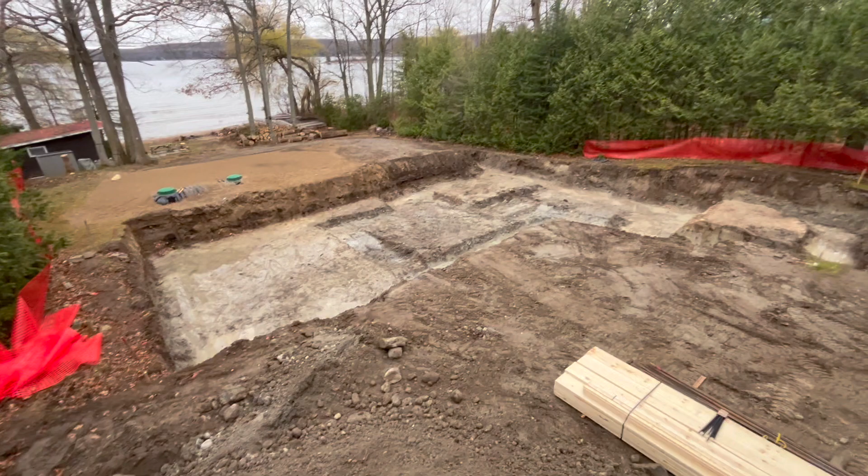I'm gonna put a laser in that back corner. The highest spot is right here. It's set to the concrete.

Good morning. Today we're working on the forms and we just got the lumber and rebar delivery coming in. So I haven't updated you guys in a while, but this is all the excavations. We ended up having to go down a lot deeper, like I said earlier, because of the old house. And I guess you can kind of see where the foundation of the old house used to be.

Our footings are gonna come across, step up, step down, and we have one step right there. My game plan is I'm gonna put a laser probably in that back corner and then walk around the edge, find the highest spot and the lowest spot, and then figure out where I want to put my level of forms down. You'll see. Okay, let's get started.

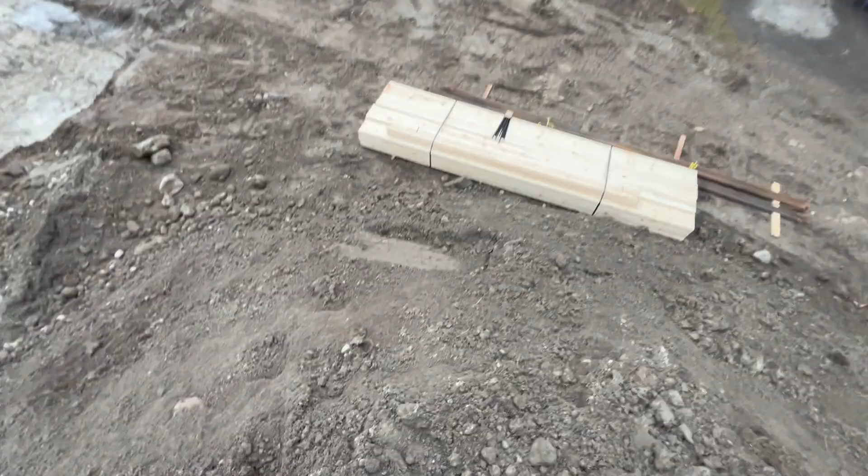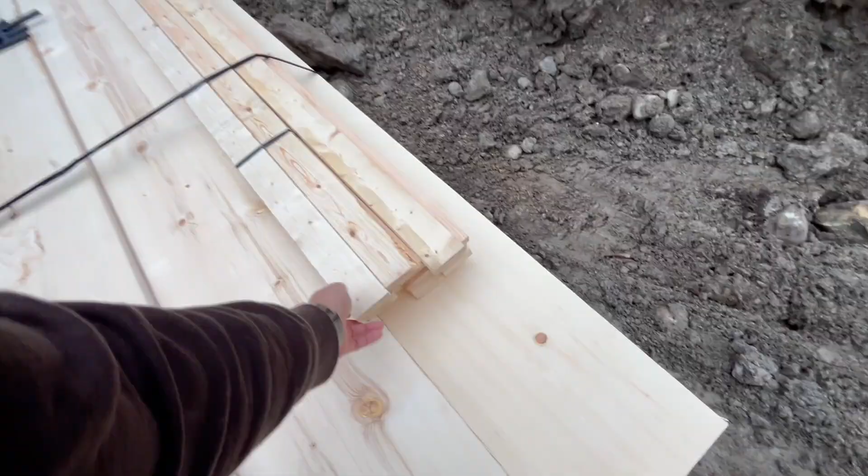This is all the lumber and rebar that they gave us. So we were forming up with 2x12s. We're gonna have some 1x3 cross pieces on top to hold them in place. Here's my 15M and 10M. So these ones will be my dowels, connecting the footing to the frost wall, and then 15 running along the base.

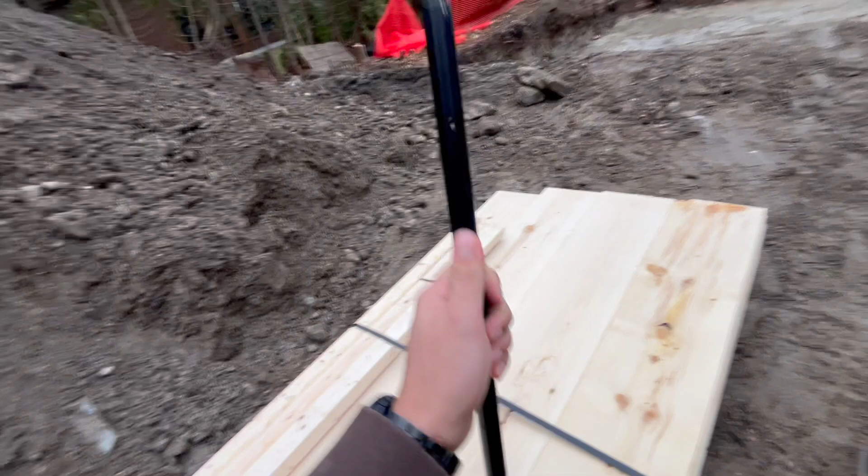And then I got a bunch of stakes. We'll use 10M and we'll use these, but we'll screw footings down like that. And then we got some safety pins over here. So if anyone falls into the trench, they don't get penetrated by the rebar. So this will just hit their chest and then they'll be stopped. Okay, I'll set the laser up and then you'll see my plan.

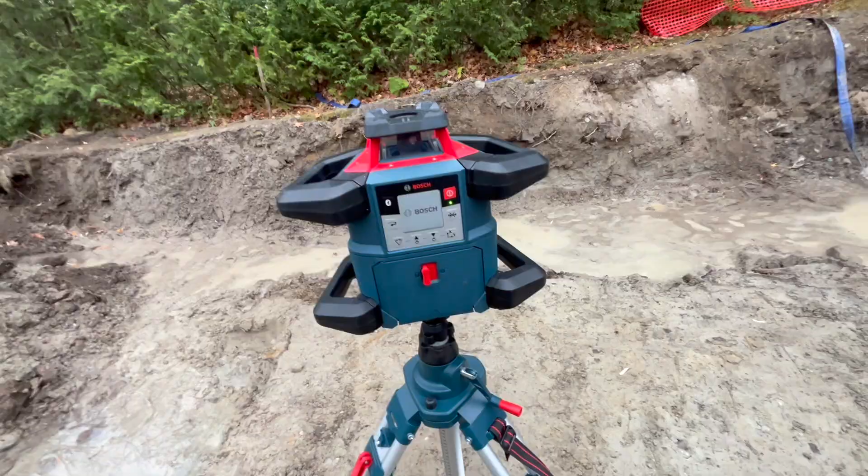Okay, so now I got my laser set up in this corner. The reason I put it there is because if I put it over there, then you wouldn't be able to see these corners here. So that's why I put it here. Now I'm gonna go take the receiver, walk around, and then find the best heights to use.

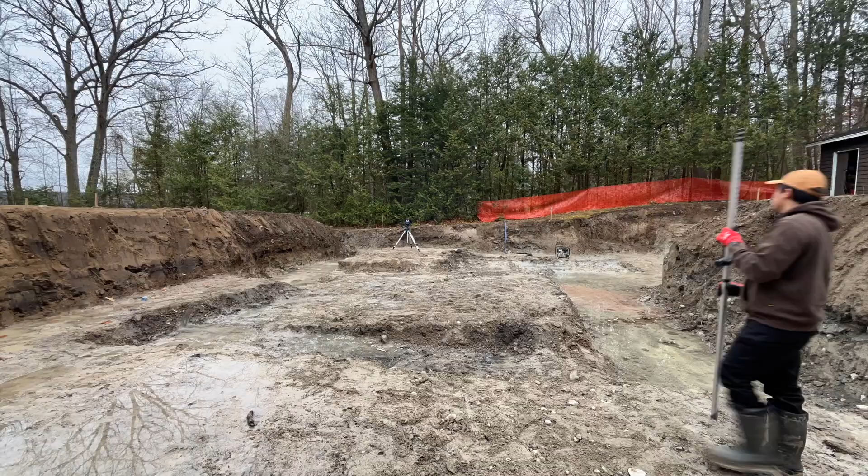What I did right there is I went along this top step and I found the highest spot. So I set my grade stick, and then if it needed to go up, I just put it up a little bit till I found the highest spot. The highest spot is right around this area right here. So that will be the bottom of my form, and then the rest of the form I'll just elevate it up a little bit.

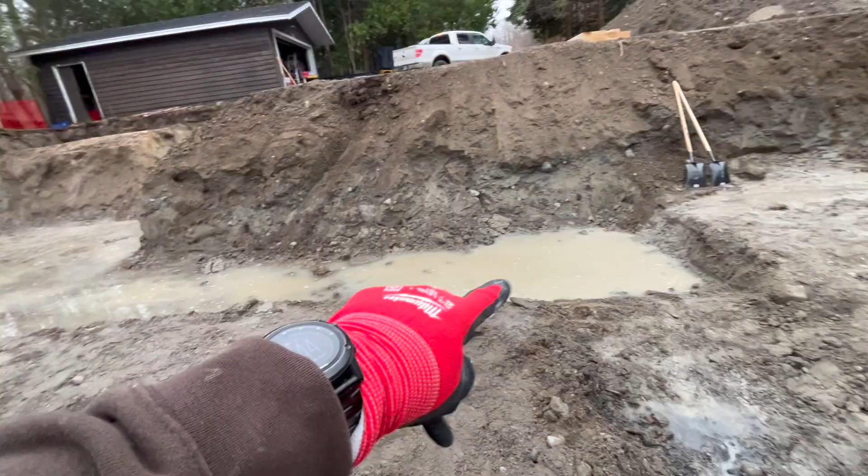So now I'm gonna do the same for this level going across all the way to there. This bottom elevation right here, coming from there, wrapping all the way around, the highest spot is around over there. And on this step, highest spot's right around here. Now what I'm gonna do is take my laser up top and pull maybe this line, and then I'll bring my footings, I'll set it to this height.

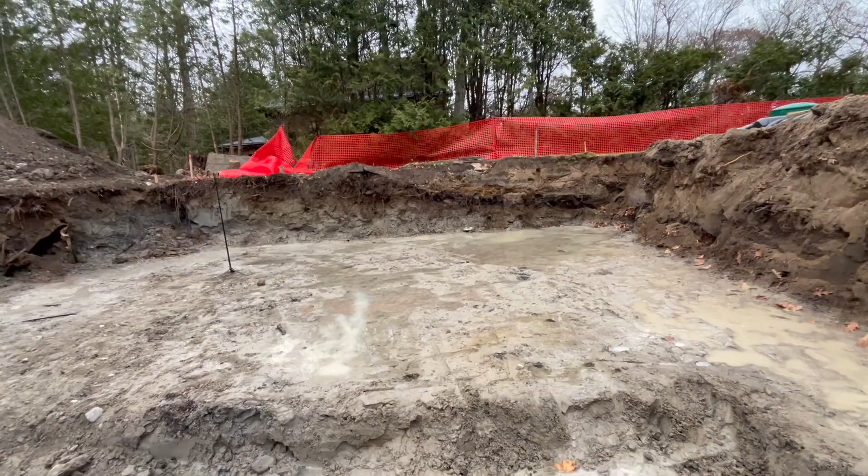Okay. If you're doing this, a tip I'd give you is ask your excavator to cut steps so you can get out of the hole easily, or have a ladder. We're gonna go get a ladder. Maybe someone will bring it up later today, but it's not very easy to get out of this hole.

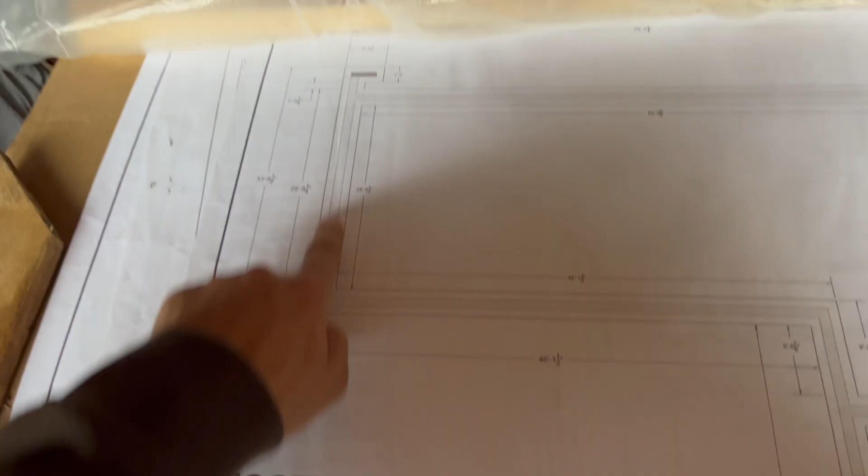Here's my footing drawing. I'm trying to form out this wall right here. My survey pins, the offsets, one's right here and one's right here on this wall, and it says 1.5 meters from the pin to the outside of the wall, and I need to put the outside of this form and the outside of this form. So I need to move it over 10 3/8 this way,

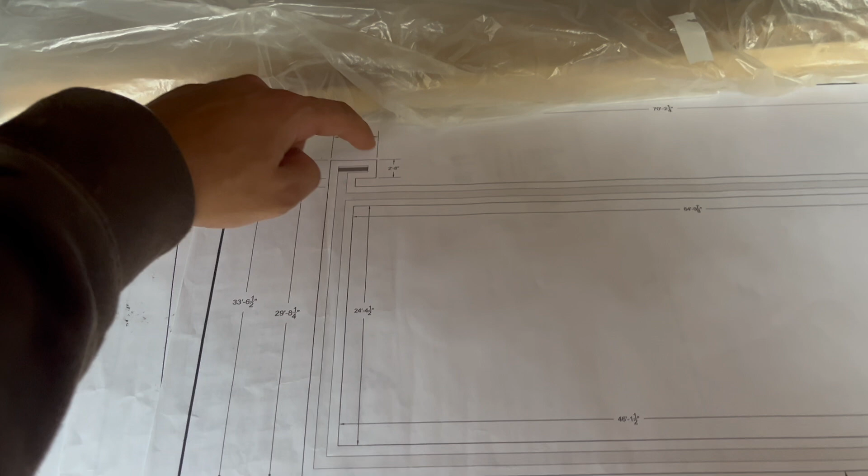and then after that I'll move over the full distance of the forms, 2 foot 8 inches this way, and then I'll set up my laser, I think right over here, and I'll shoot this line across, and then I'll shoot this line across, and I'll stake out those forms. Okay, it's hard to see, but I have a pin down there. I can see it with my eyes, but I guess the camera can't see it.

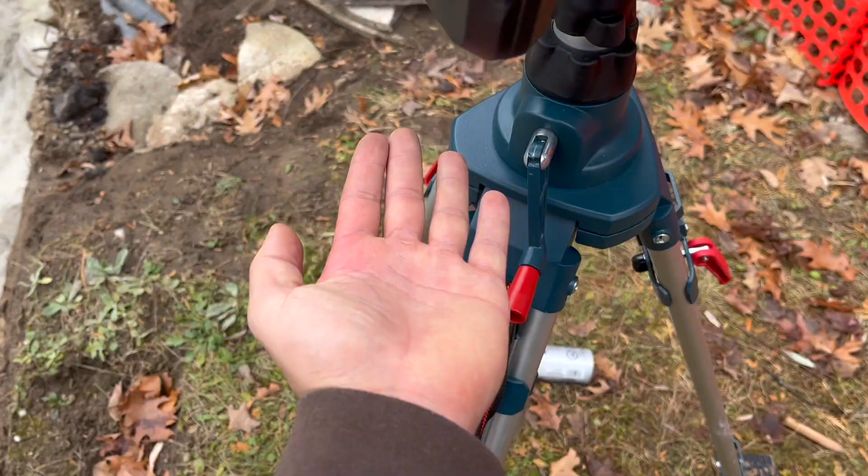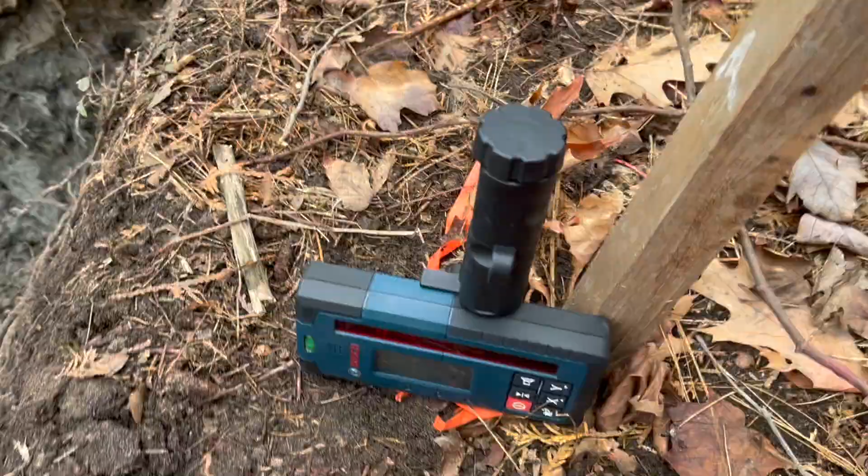But I got that line up there, and I got my receiver all the way down there on full volume, and I have the center of it right on the middle of the stake. Okay, so if I twist it this way, I think I should get something. So I just need to turn it a tiny bit more. You can see down there, right there. So when it goes green and solid, that's it. And down here, I don't know if you can see it. No, you can't really see it, but it's right on top of the pin.

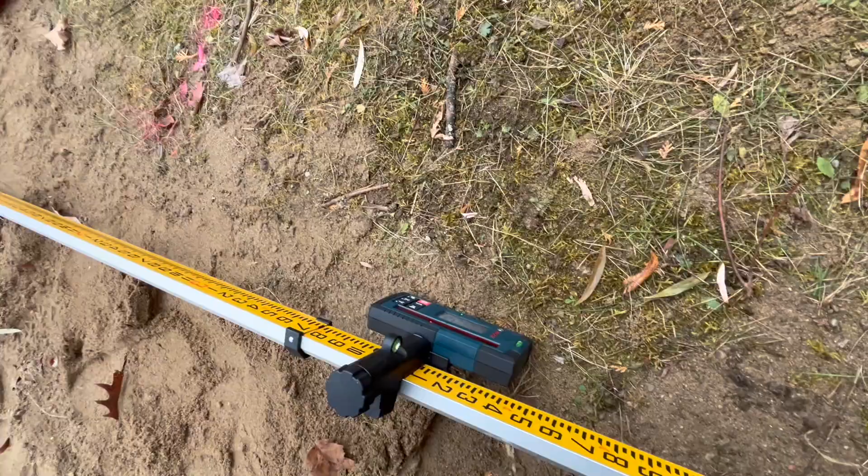So now I got my offset, and now I can measure off the offset and set up a new stake or something right here, so then I can put the edge of my forms. So I got my laser set up on the offset, and now I'm bringing it over to the inside of the form. I set it up so that that's the inside of the form right there, on this pin. And I'll do the same thing on the other side, and then I'll move my laser right across here, and then I can bring my receiver and slide it right across the form to make sure it's always straight.

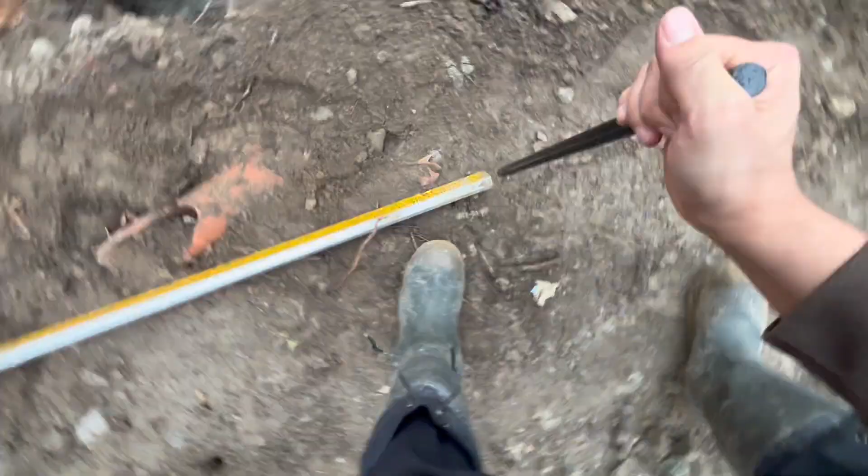Okay, so now I got this side solid. So I'll take my stake, and then this will be the inside of the form on this side. I'll pound that in, but if I push it against it, so that's perfect. Now on this side of the stake will be the inside of the form.

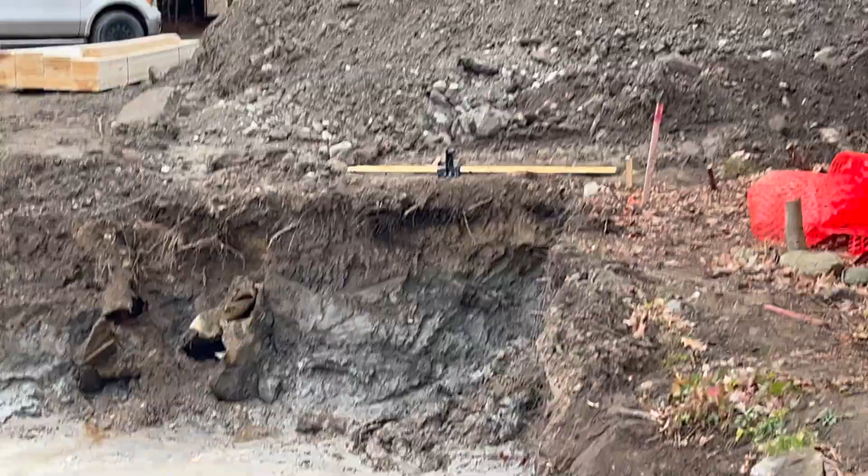That's pretty crazy. I just set up the laser. I didn't even try to set it up. I was like, what's that ringing sound? And it's hard to see, but that's green, and that means it's set up properly. I literally just placed it down, and somehow it's perfect, so that's nice. Now we're good to set up the forms.

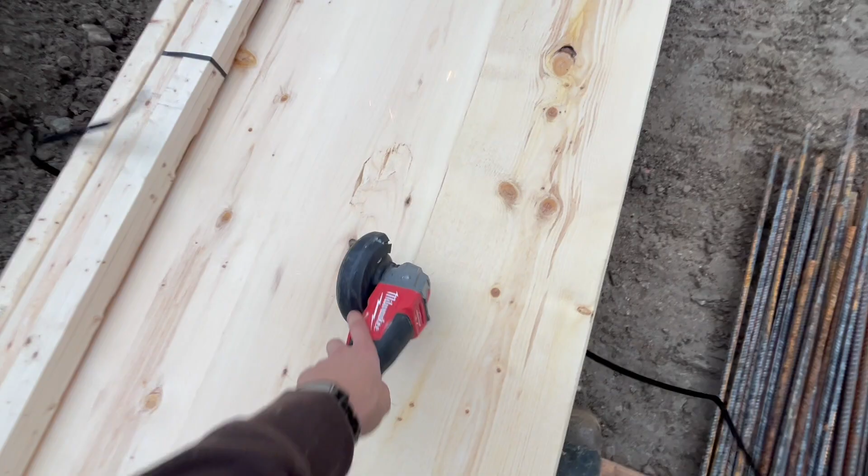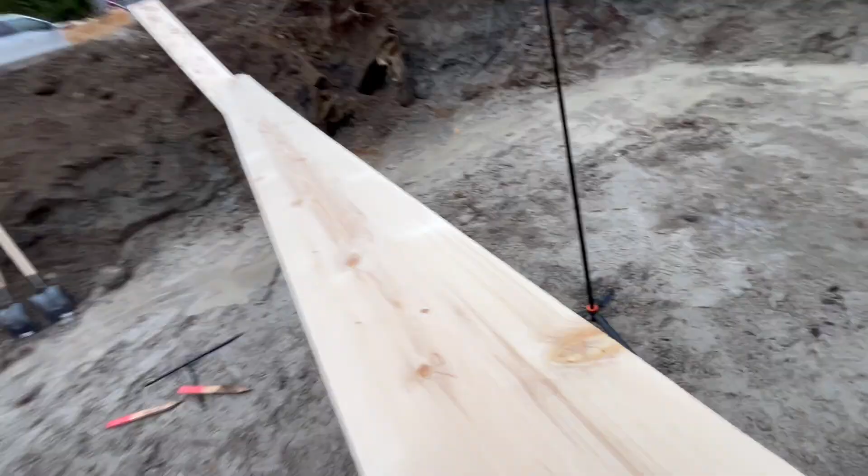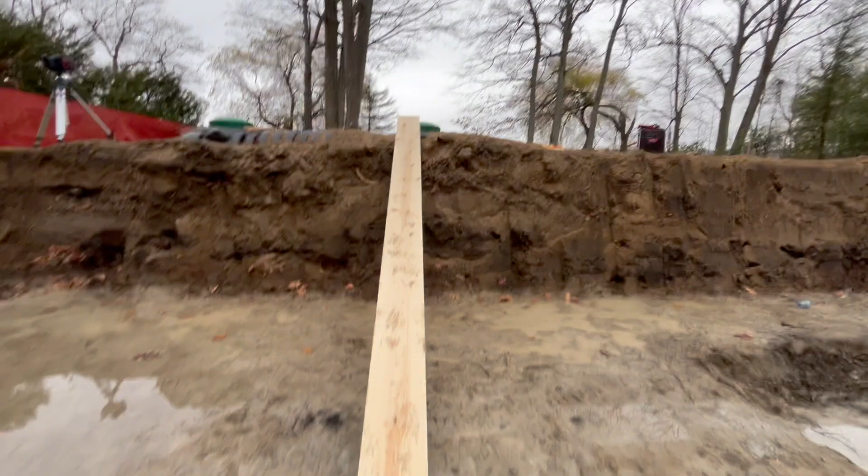So we're just getting started. I made myself a little ramp. Well, it's not too sketchy, especially because I'm holding a board. There we go. Easy. Okay, this is pretty nice. I got a way in and out of the trenches now, so I can just run up these. And this will make do until we get the ladders here. I needed this thing.

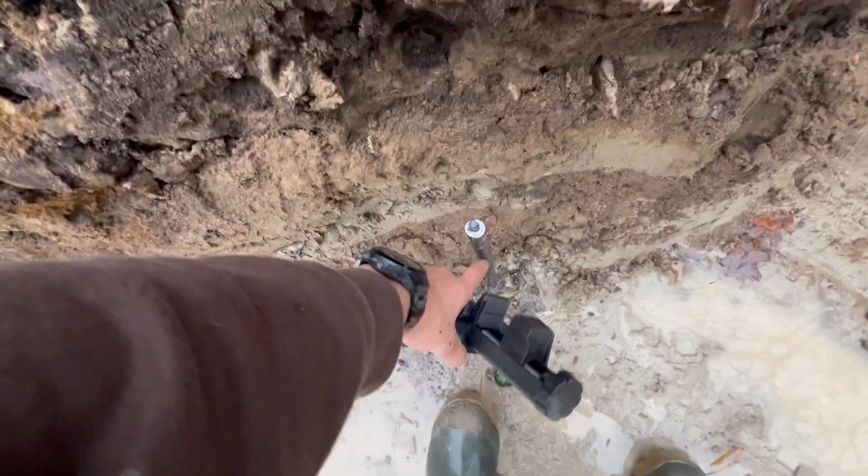So this is a little bit of a problem. This is the inside. So this is where the 2x12 will be. And right on the edge here, right there is on the edge. This is pretty close to the wall. So we're gonna have to dig that back a bit. Hopefully it's not like that over there though. I guess we'll take a look.

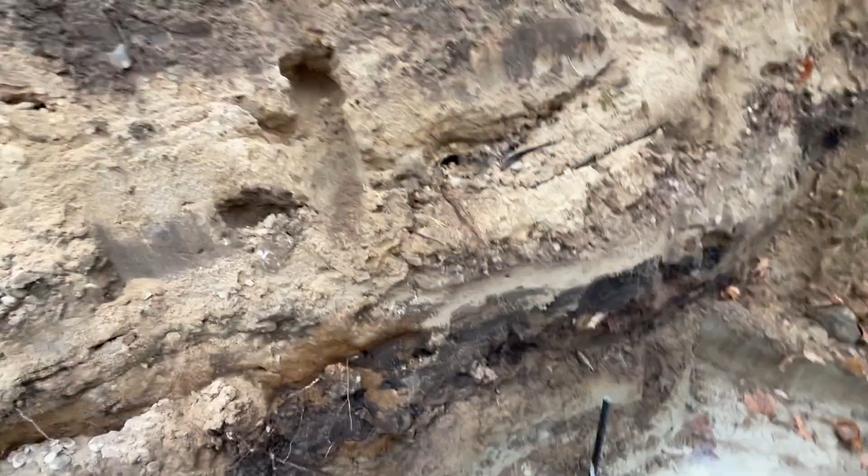Okay, so on this side, we seem to be okay. Lots of space here. Just in that corner is a little tight. But it's kind of too close to this wall, so unfortunately I have to dig this wall back by hand a bit.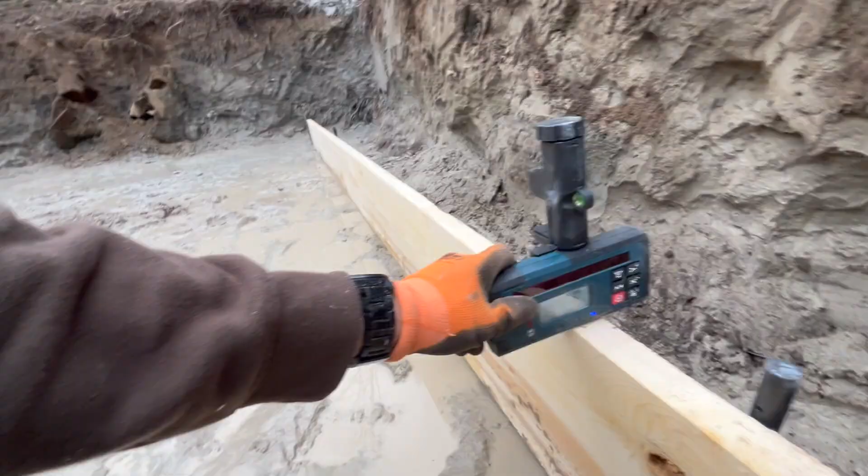I still got that laser going across on the edge of my footing. I have it temporarily supported, but as you can see, if I put it right on the edge, that's perfect. This is what the laser is reading right here, and it transfers to this line. So if I put this line right there, perfect. Put it here, it's perfect. And here, oh, so I gotta fix this one. But you get the point.

I got the first board basically in, just temporarily, but there's supposed to be a weeper right there. So probably gonna have to dig this out further, at least this distance right there. Kind of sucks, but you gotta do what you gotta do. Using the same laser, I put this side of my footing, so now it's set to the concrete.

All right, so my old circular saw stopped working. I got a lot of 2x12s to cut, so I'm gonna upgrade and got the rear handle. So two of my friends already have this saw, so I already know it's great. Not much of a surprise, but we'll put it to use building the forms. We'll put this blade on, and then we'll do some work from the hole.

We're putting up the forms like this, and then we're putting the 1x3s across to hold it straight. And then after we get the walls laid out, we'll come by and put the laser back over there, and then make the whole form level this way. We'll continue with that. This is my brother Cal. He's cutting the 1x3s, and we'll just continue around the corner in a bit.

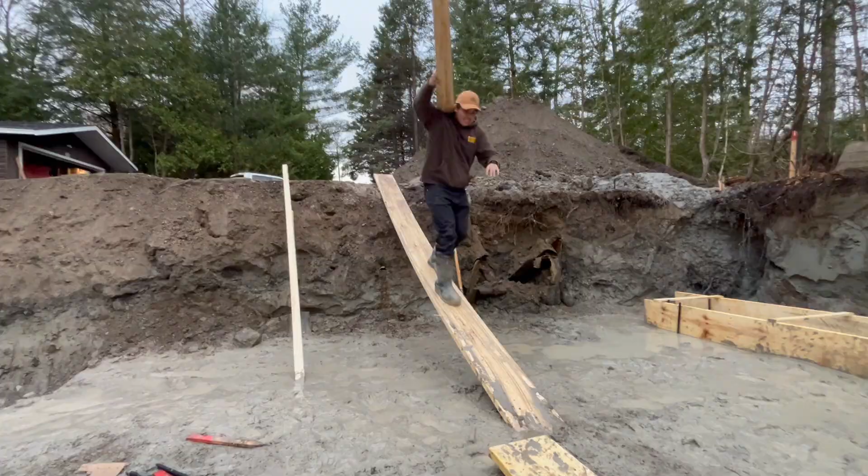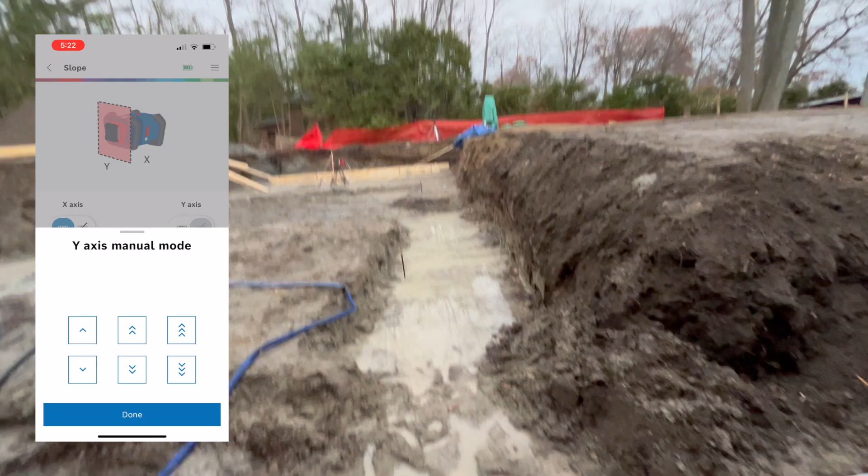I'm starting to learn how to use this laser a lot better, and I use the phone app. I set it up all the way across over there, maybe just under 100 feet, and I can use the phone app to make the laser tilt this way or this way along, I think it's the Y plane. And then I had my receiver set up right here, right at the edge of the stake, in the middle right there.

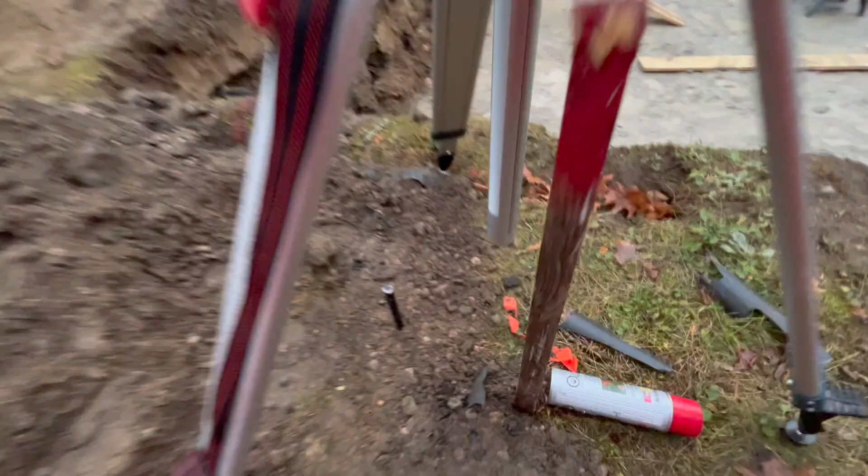This is right on the edge of the stake, and I was able to use the phone app to adjust the laser level until it is perfect. Now I have a straight line I can work with, and that's where my outer form is going to go. Okay, and I just came here to check that it's right on the edge, which is hard to see on the video, but it is. And now we can start framing out this footing.

This one is roughly done. The stakes on the inside will be taken out. I'll add more stakes on the outside, and then I'll put more of the cross pieces once we put the rebar in. The way I'm going to do it is I'm going to use tie wire and just hang the rebar off those middle pieces. And then I'll put my 10M dowels every 4 feet. That's why I spaced these things 4 feet, at least the first one. Eventually I'll do 4 feet spacing for those two. Okay, we'll get started on this one.

All right, this has been my method for setting forms. I got the receiver and find the laser once it's solid. And then it's right here too, I can kind of see it. This is the edge of the concrete. I'm gonna have to put in the edge of the concrete in the meantime, just because there's the 2x4 thickness, and I don't want to just guess that, so I'll just put in this. I'll put the board against it, put another stake on the outside, and then I'll take these out later. So that's how I've been doing it.

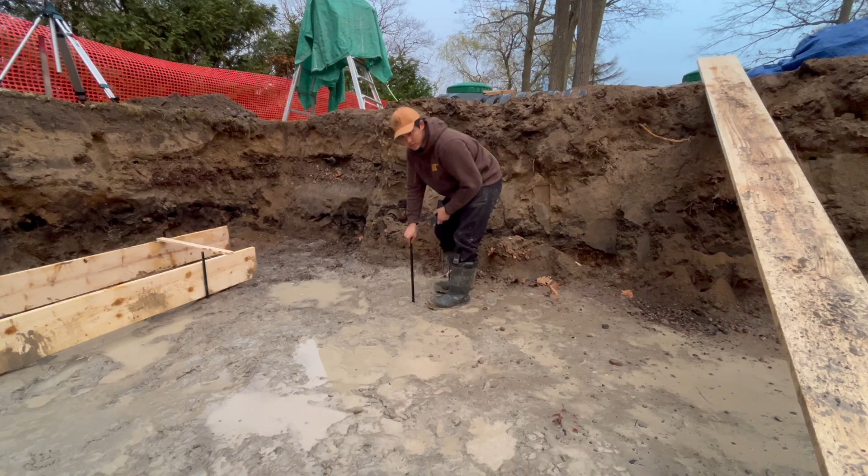And actually you can kind of see the laser without the receiver, so I think I'll just hammer it in like that. I don't like having a muddy hammer, so this is my hammer spot, because I don't have my belts on me right now.

Because it's temporary, I don't have to worry about the screw holes, but on the side that's gonna be screwed in, I need to make sure the screw holes are in line with the lumber, so then I can screw into the wood. But if I forget, I can just hit it and twist it as I'm hitting it, because then it will spin when it breaks the tension. So if I was doing it, it would be like this. Now they're straight this way. Okay, I'll give you an update in a bit.

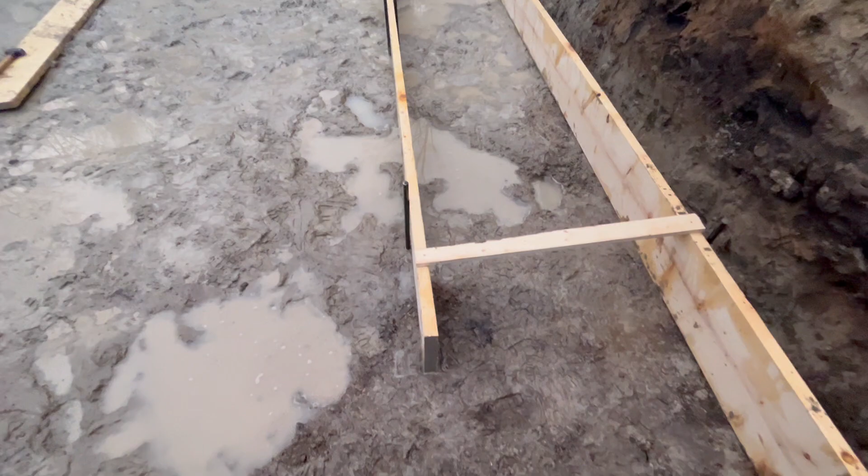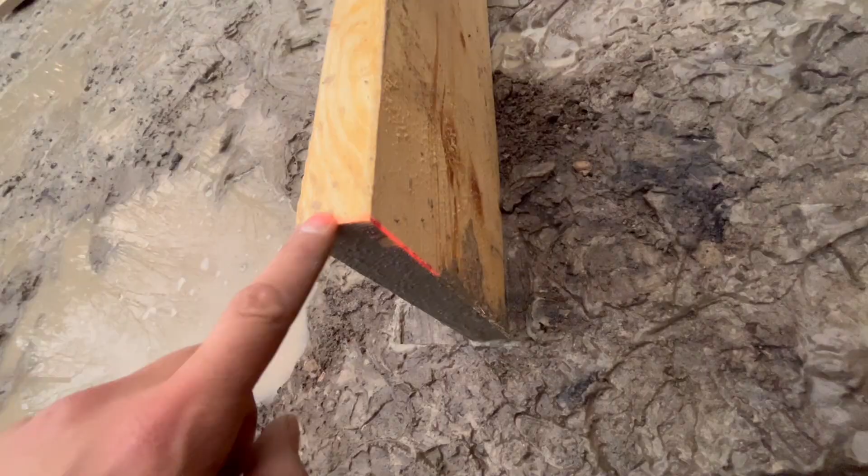I don't know how I'm getting so lucky. I was putting these in and I was gonna cut it after, just so I don't have to worry about pre-cutting and then figuring out everything on the spot. And I'm gonna put my board against that. I was gonna put another stake over here, but turns out this is already flush with the laser. I don't know if you can see that. So I literally can just put the board right against that and then we're good.

I just climbed the big dirt pile so I can get you guys a good time lapse building the forms. Hope you enjoy. After this time lapse, we finished up for the day.